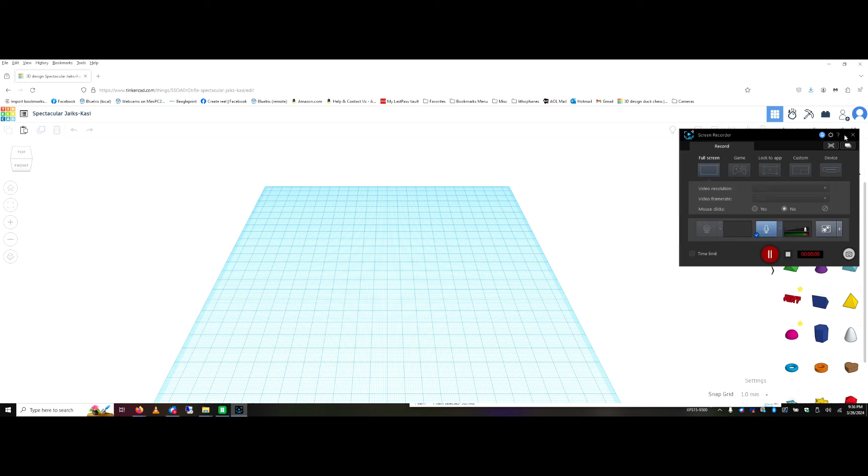In this video, I'm going to show how to make a screw top container using Tinkercad for 3D printing.

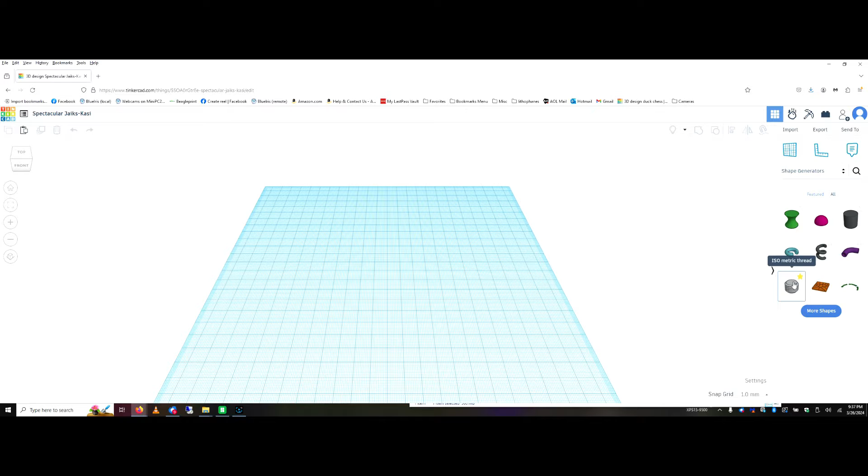First, come over to the pull down list and go to shape generators at the bottom. The one we want is the ISO metric thread. Click and drag this out to the workspace. I always like to change my view to orthographic, that way you don't have the perspective issue when it's trying to draw things perspectively.

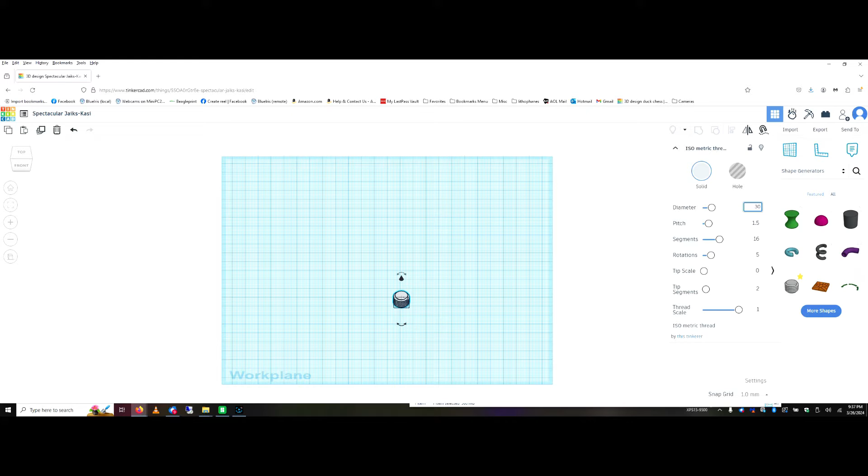I'm going to set the diameter of this thread to 30. Now the pitch, you'll notice when you increase the pitch, that separates the different loops of the thread. So for a pitch we are going to put it to 1.

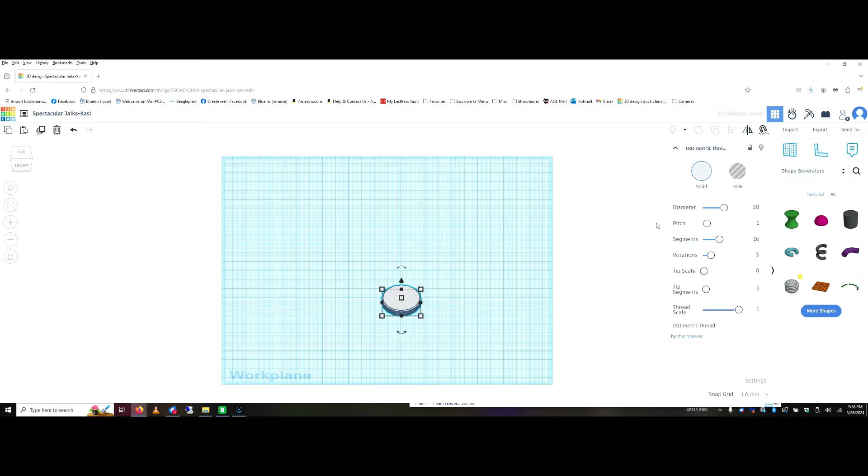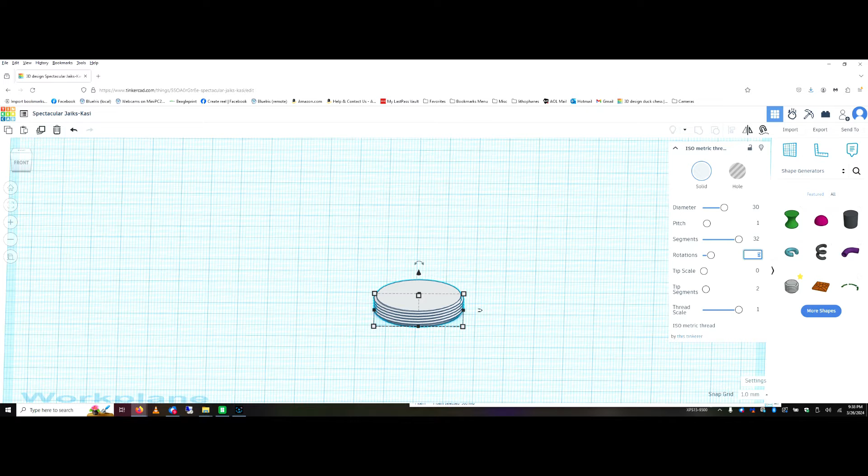Let's do a more sideways view. Segments, this is how it smooths those threads, so you want to jack that up as high as it can go, to 32. The number of rotations is how many of these threads there are going to be, and for our particular container we're going to have 3 rotations.

Now the tip scale, let's zoom in. The tip scale affects this tip right here. As you increase the tip scale, it becomes more and more square, and I want to keep that pointed, so we are going to have a tip scale of 0.

Now the tip segments, that's going to thin everything out, and the higher that value, the harder it is to 3D print because you need more supports. So we are going to keep the tip segments to 1.

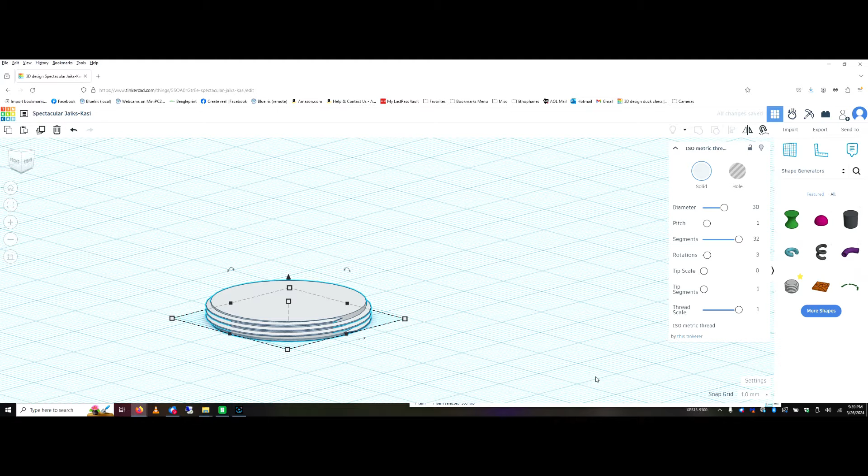Now we're going to keep this one as the male. When we make the hole that this is going to screw into, we're going to want that hole to be a little bigger. So to aid that, we are going to set our thread scale to 0.8, which makes all these different threads a little bit skinnier.

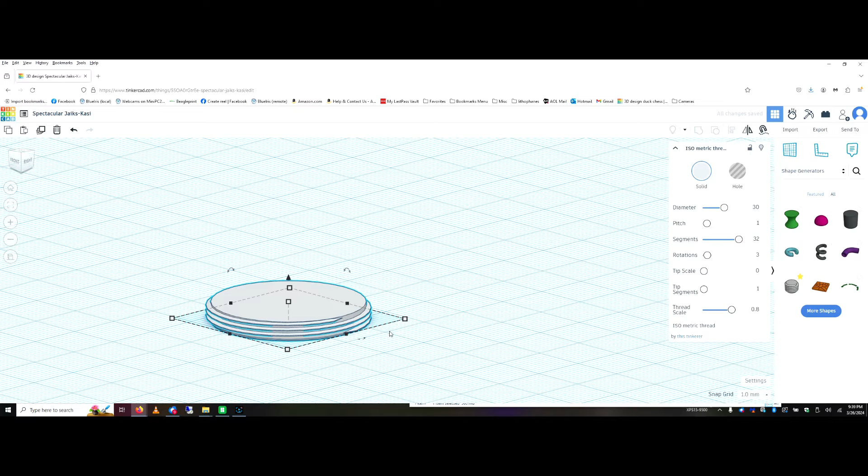Now we're going to make our hole. To make our hole, we are going to duplicate it. I'm going to select it, do Control D to duplicate it, and make it into a hole.

Now we want our hole to be a little bit bigger than the other one, so we're going to set that to 31 by 31. We're going to keep the height the same, but set the width and the length a little differently.

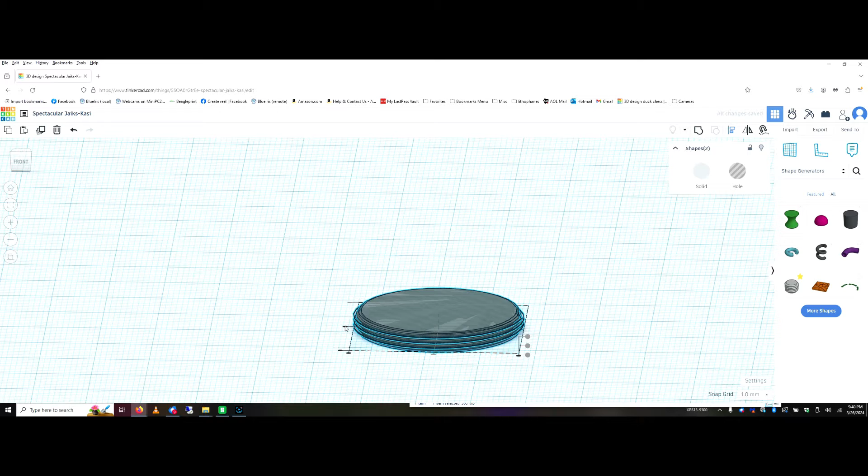We are going to select them both and center them. So I'm going to center them in the middle here and center them in the middle here.

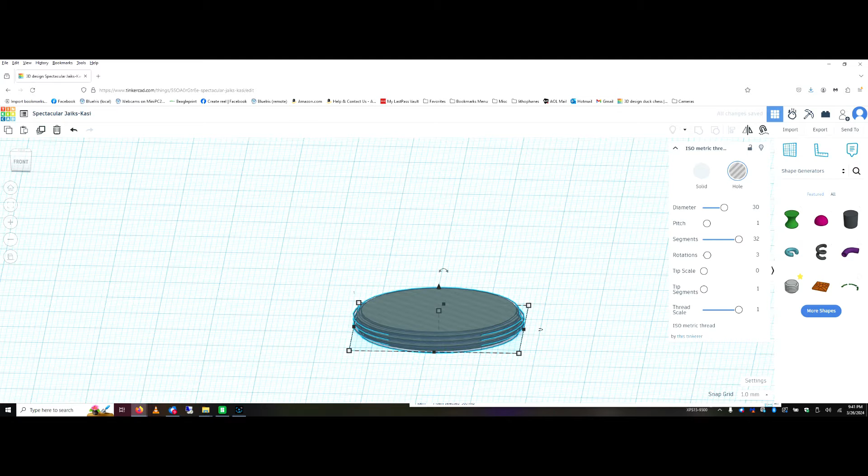Now we're going to select our hole again, and we're going to size this a little bigger so we have that tolerance when we 3D print, so they screw into each other easily. We are going to set the thread scale of our hole to 1. Now if we look at it from the front and zoom in, you can see we've got a really nice tolerance here all the way around.

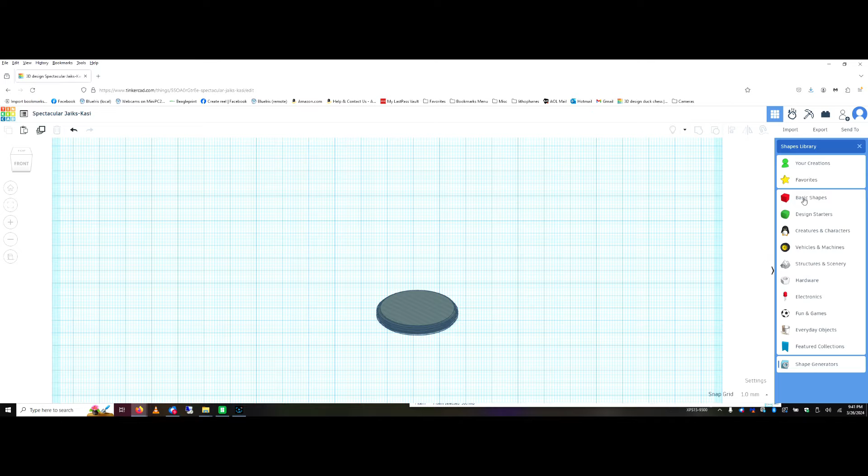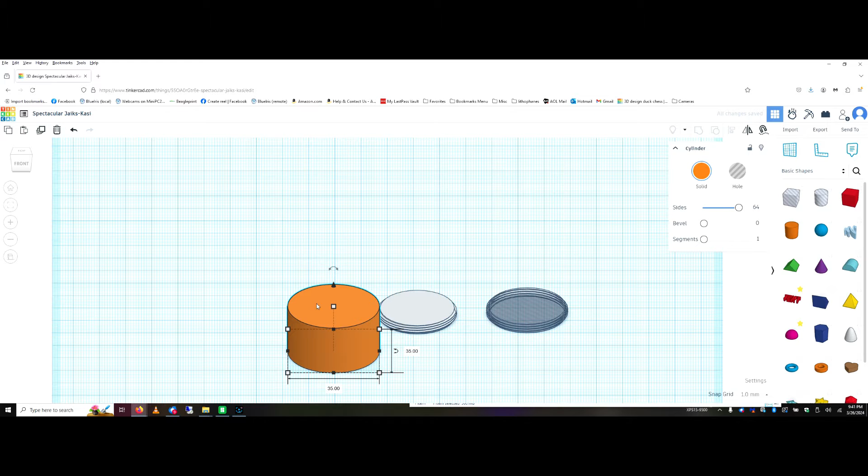So now we need to make our container. We'll come back over to basic shapes and drag in a cylinder. We want to jack up the sides as far as it can go so it has a smoother side, and you want this to be a little wider than the threads. The threads are 30 by 30, so we're going to set this to be 35 by 35, and we'll keep the height at 20 millimeters.

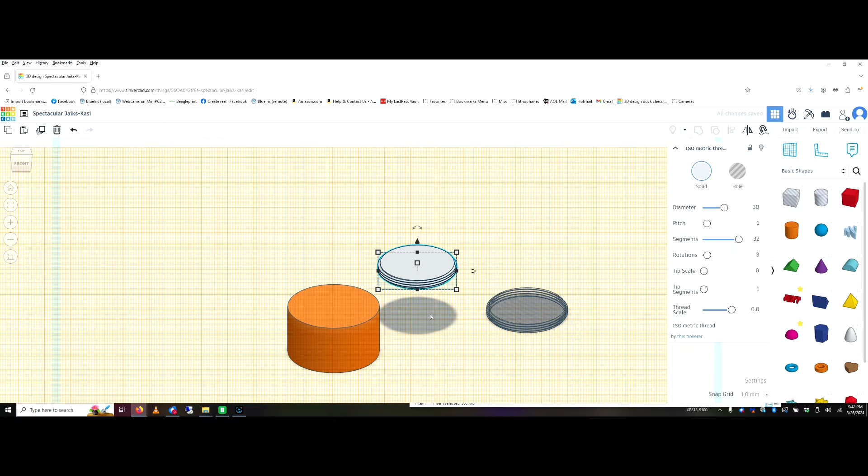Now we're going to place our male threads on top of this. The easiest way to do that is to use the work plane tool and drag that on top of our cylinder, which is going to be our base. Now we'll select our male threads, hit D, and that's going to place it right on top here. To get rid of this temporary work plane, I'm just going to click and drag this out again.

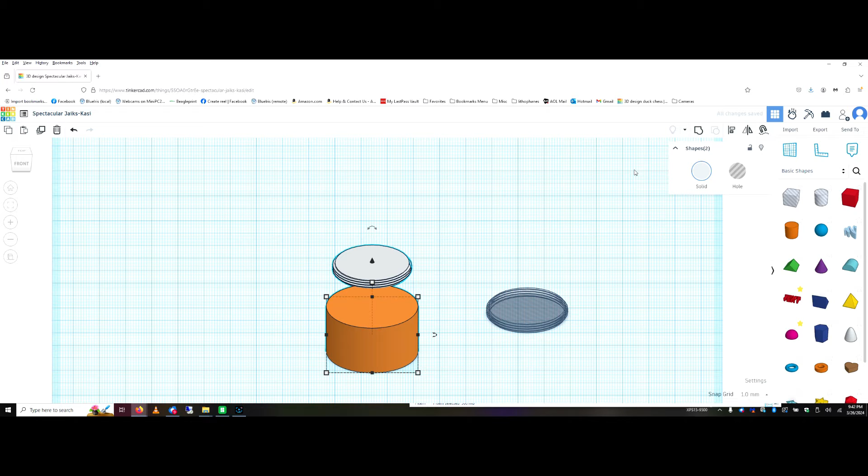We'll select both of these and align them in the center this way and the center this way. That didn't take, so let's center it this way again.

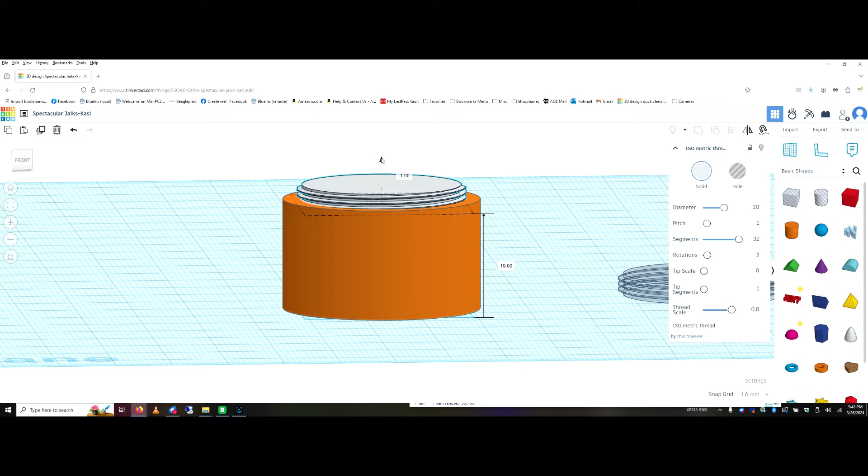Let's zoom in a little bit. And then I'm going to further lower the male thread 1 millimeter down into this. So I've lowered that 1 millimeter in.

Now for our lid, I'm going to go ahead and select the bottom here. I'm going to duplicate it, keeping all the same parameters except for the height, which I'll change to 5 millimeters.

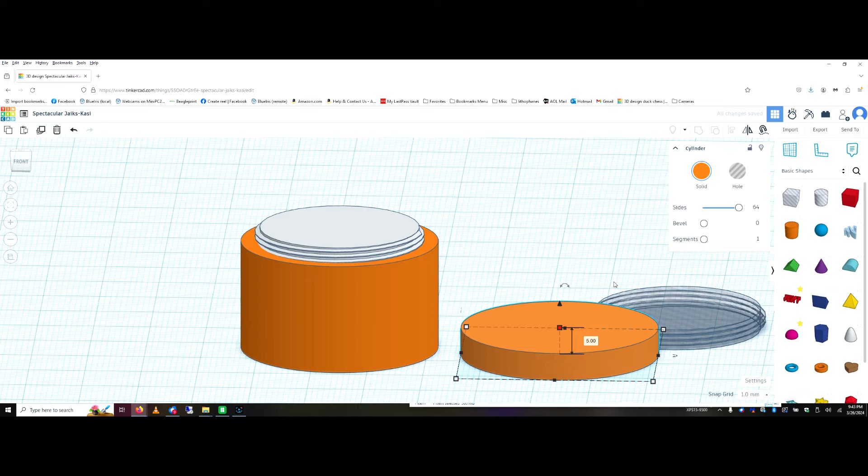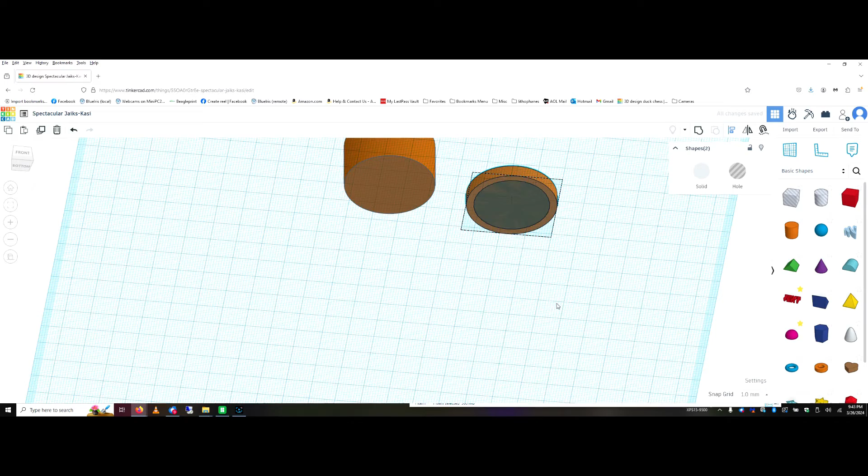I'm going to make sure both of these are on the ground level. So I select them and press D, which makes sure everything is flat on the plane. Now I'm going to align these up, center this way and center this way. So now we have our hole in the bottom of our cap.

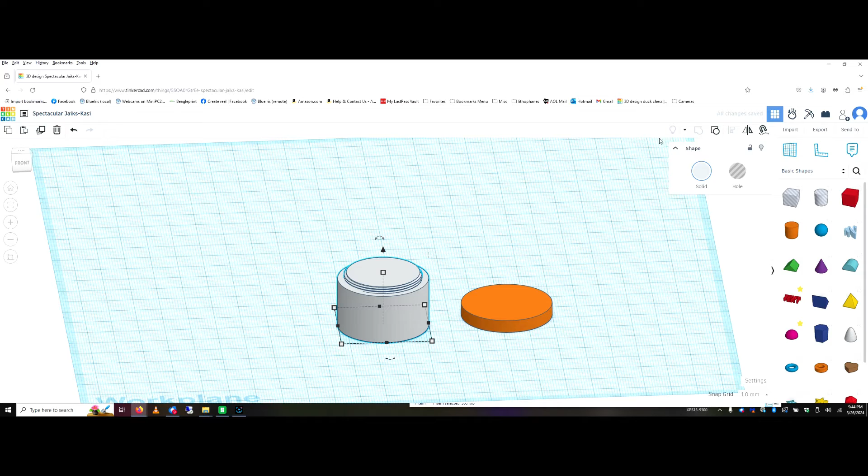I'm going to select them both, and I am going to group them. So now we have our cap made. And also going to come over here, and I will group them. And we've almost got our bottom container made,

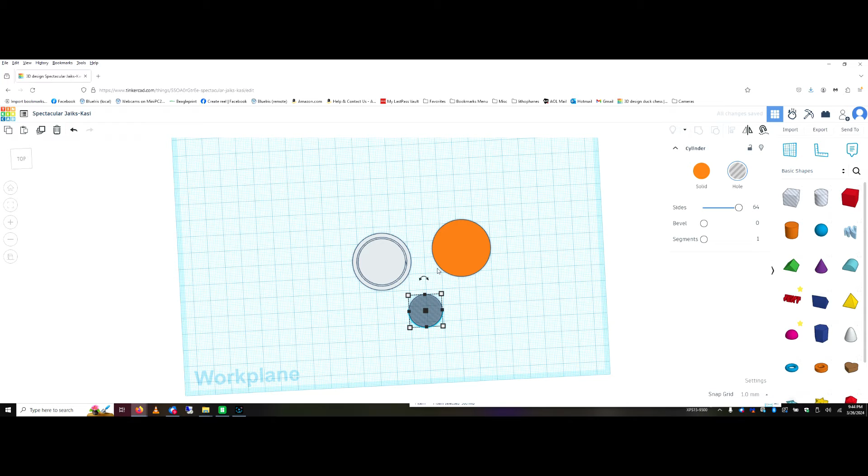except we're going to want to drill a hole into it. So I'm going to bring a cylinder in that is a hole. We're going to set the sides again, jack it up as high as it can go. And I'm going to make sure that this is higher than—whoops, didn't want to do that, undo—higher than my cylinder here.

And how I'm going to size that, let's look at the top. I want it to be just shy of this inner circle right here. So I am going to size this hole to try and guesstimate to be about in the center here.

My snap to grid is a little bit too much at 1 millimeter, so I'm going to change it to 0.1 millimeter, and I want to size this a little bit bigger. I want to make sure that they're both the same. Let's try 28 by 28 and see how close that gets us.

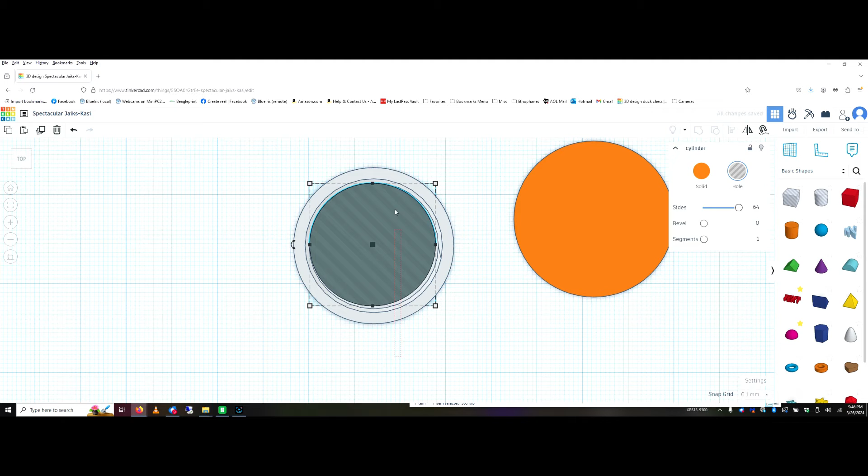Let's go ahead and center it here, and center it here. I'd like to have it just a little bit less, so let's set that to 27.5 and 27.5. I don't want it right at the edge of that. So let's center this again. Okay, that looks good, so that will give us a little bit of a lip

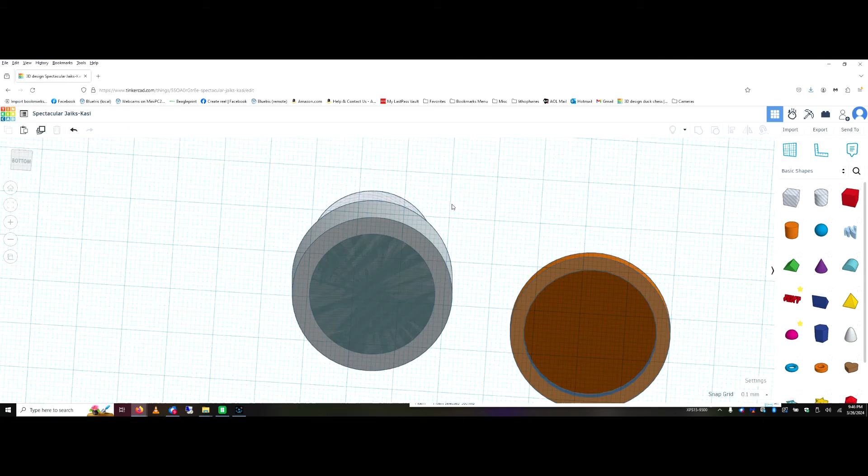for this first thread. Now the way it is, if I group this as it is, it's going to punch all the way through. So what I want is a 2 millimeter bottom. I'm going to select my hole and raise it 2 millimeters—I can just type in a 2 here.

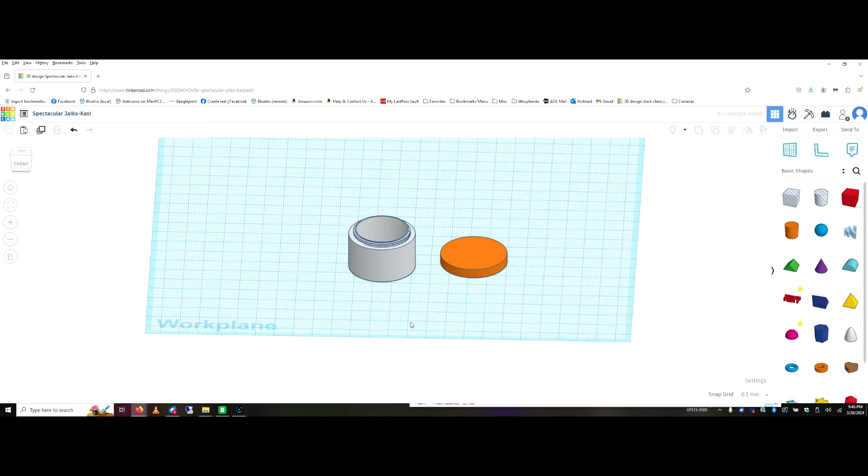And now I can select everything, and now we've got the bottom of our base made. Now something I'm going to do is check my lid. So I'm going to select this.

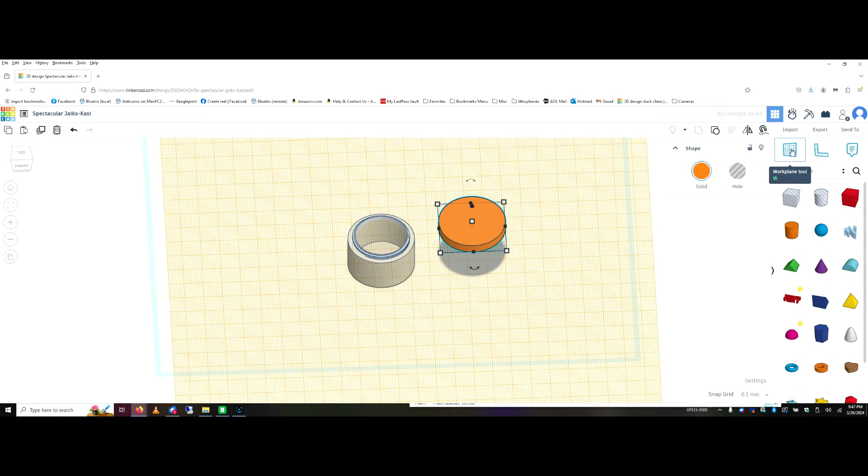I'm going to bring in a work plane right on that lip, and I'm going to bring my lid up to that level. We'll get rid of our temporary work plane, and let's center these two.

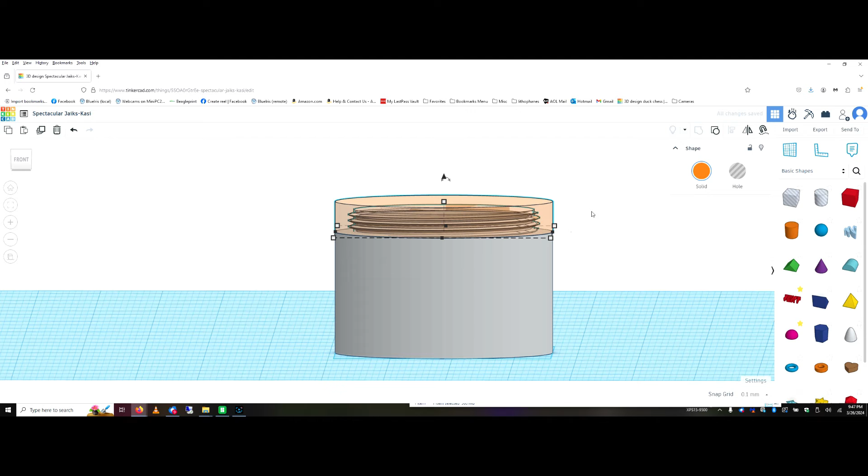Now what I want to do, I'm going to zoom in here. I'm going to make the lid transparent, so I'm going to select the lid and type T to make it transparent. We'll center it on the front and zoom in.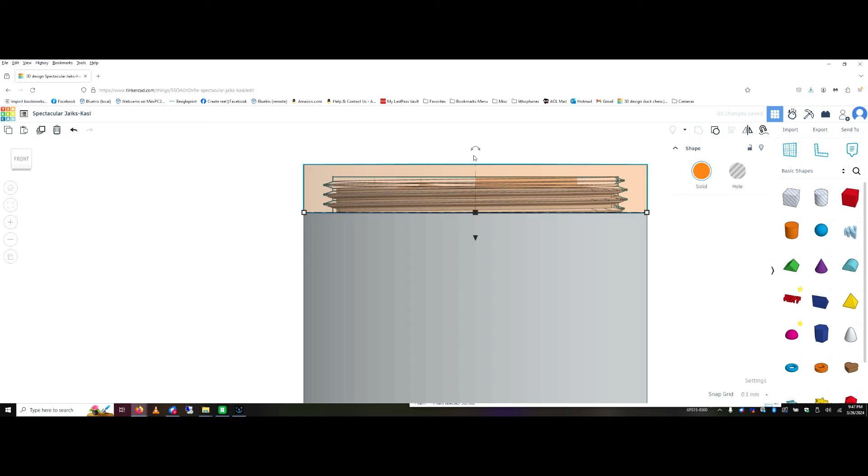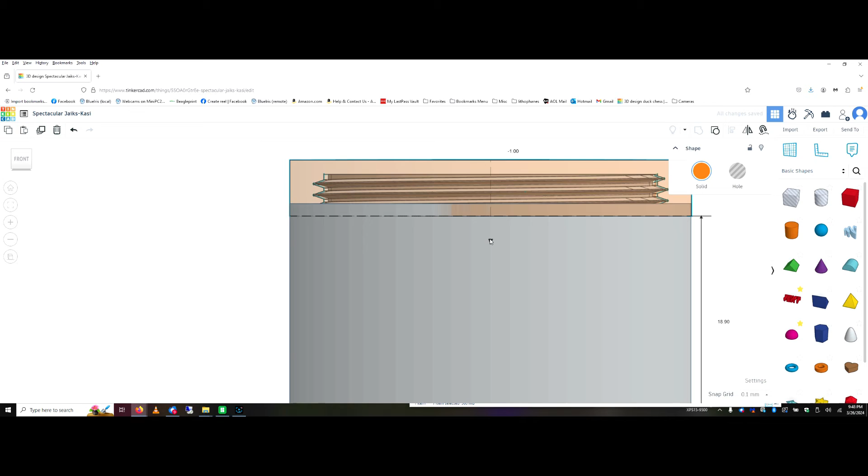And what I need to do, let's raise this just a tad. That's too high. So you'll notice that the offset here is a little bit too much because we want it to screw into here.

And so what I'm going to do is ungroup these and ungroup this, and let's lower that. 0.8—so 0.1, that's in at 0.1.

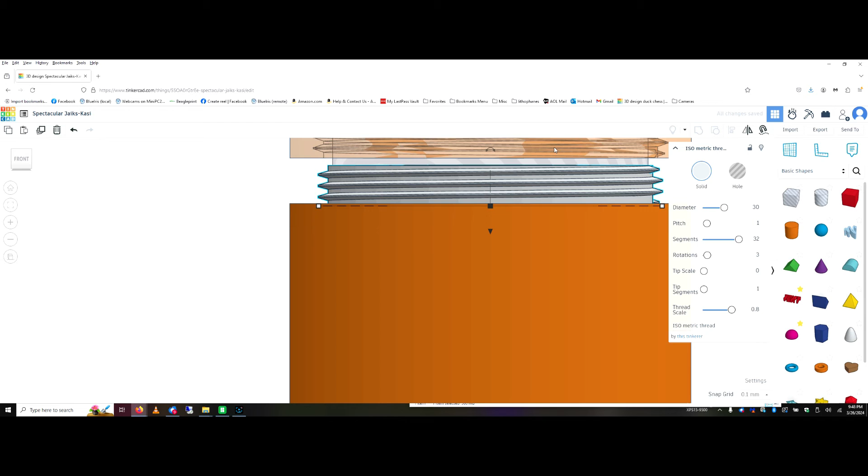And then let's bring down our... okay, so I am going to raise my lid to be about where I'm going to want it when it screws in, to have maybe that much clearance.

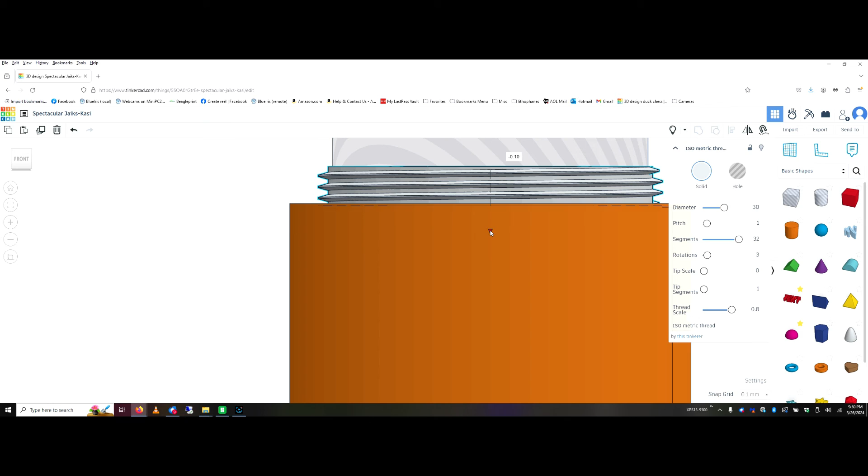And so what I'm going to do is lower—let me go ahead and hide the lid. I am going to lower this a full 1 millimeter, and let's look at,

okay, that's a little bit too much. Let's raise that up. Okay, so that looks good. That looks like we'll have good clearance, and that will put our lid almost touching the base here.

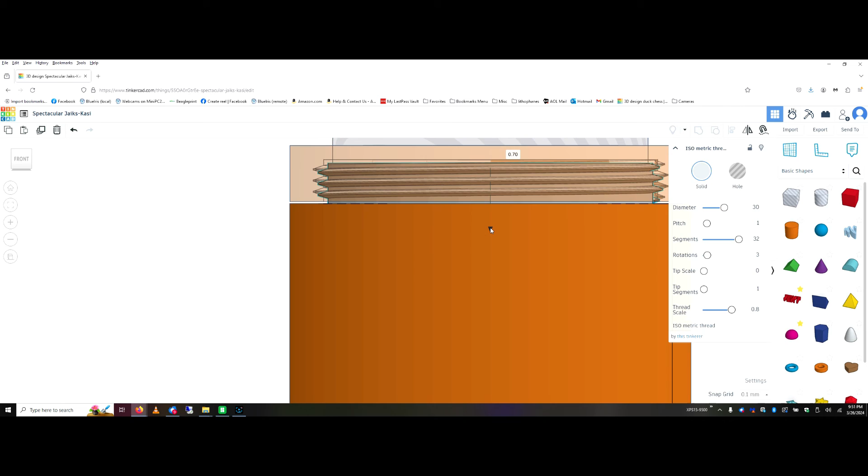And so we're just checking it. You know, if we had this come all the way up, then that would be too much. So about like that—that looks pretty good.

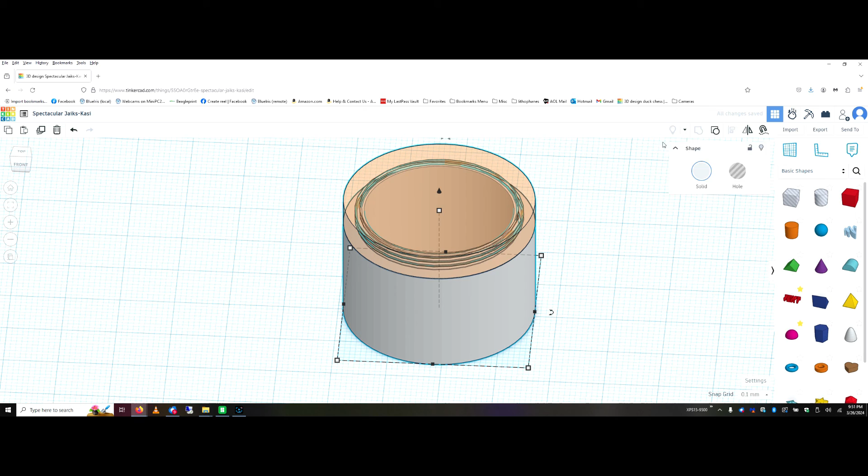So I'm going to hide my lid so that I can come in here and regroup all these. So when I display my lid, it looks like we've got pretty good tolerances here.

So I'm going to go ahead and move my lid, drop it down to the plane, and rotate it 180 degrees.

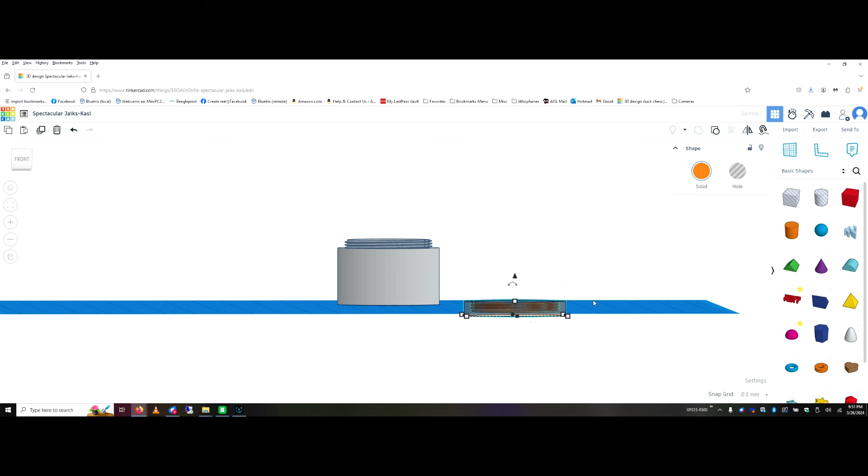Because that makes it much easier to print. And so I'm going to print these, and we'll see how that turns out.

All right, and here is our printed result. You can just screw on the top, and it screws on nicely and has a nice snug fit. And it's a strong screw—it won't come off. So I'd say that turned out pretty good.